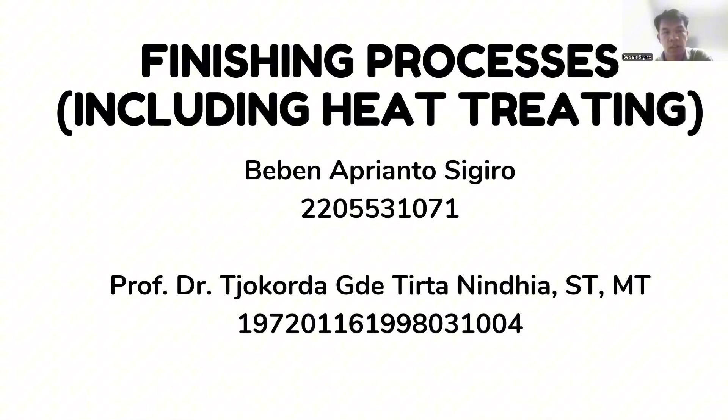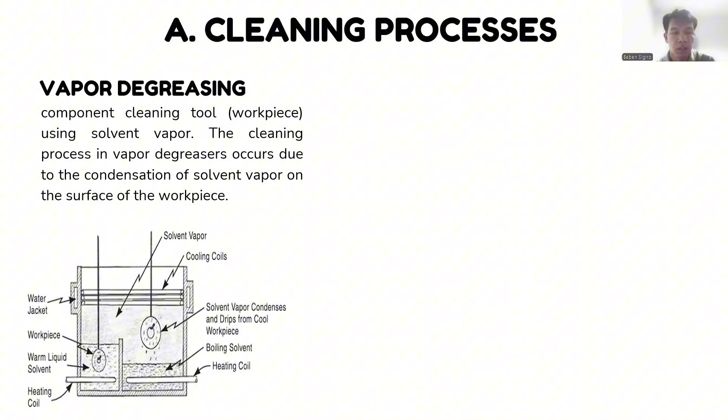Cleaning process: vapor degreasing, component cleaning tool or workpiece using solvent vapor. The cleaning process in vapor degreasing occurs due to the condensation of solvent vapor on the surface of the workpiece.

B. Polishing process, conventional polishing. In addition to enhancing appearance, polishing processes are used to facilitate fluid flow, eliminate burrs, create space for assembly, and eliminate surface indentations that may be stressors or places where corrosive material could become trapped.

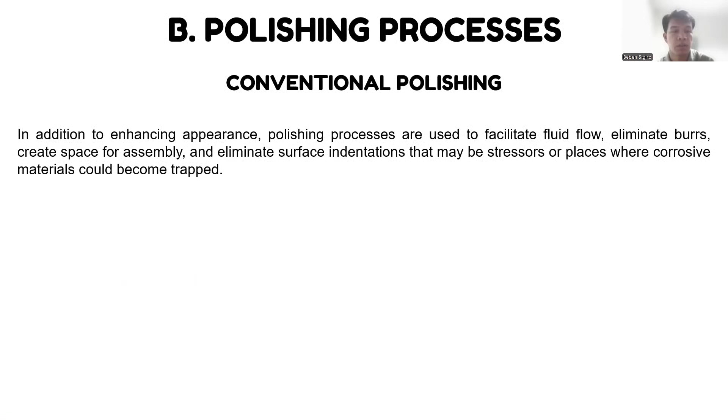C. Plating process, conventional electroplating. The method of applying a different metal to a workpiece by use of DC electric current, which drives an oxidation reaction at the anode and a reduction reaction at the cathode to deposit the metal.

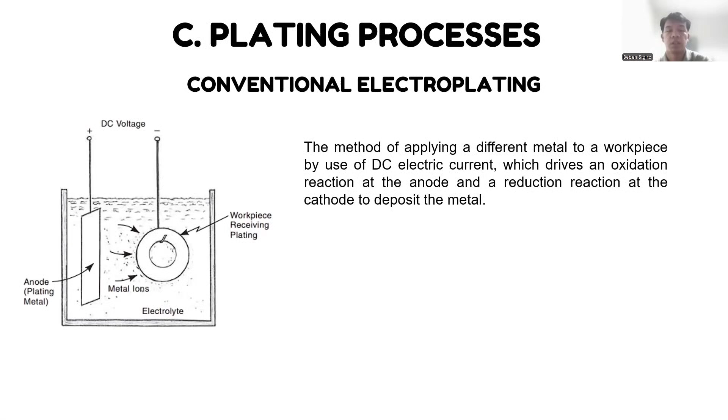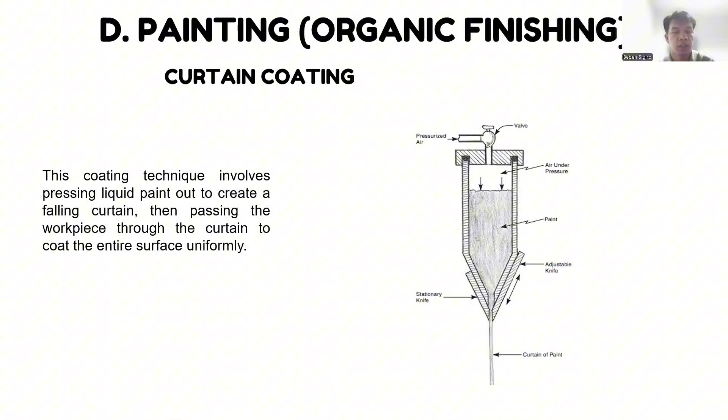Painting or organic finishing: curtain coating. This coating technique involves pressing liquid paint out to create a falling curtain, then passing the workpiece through the curtain to coat the entire surface uniformly.

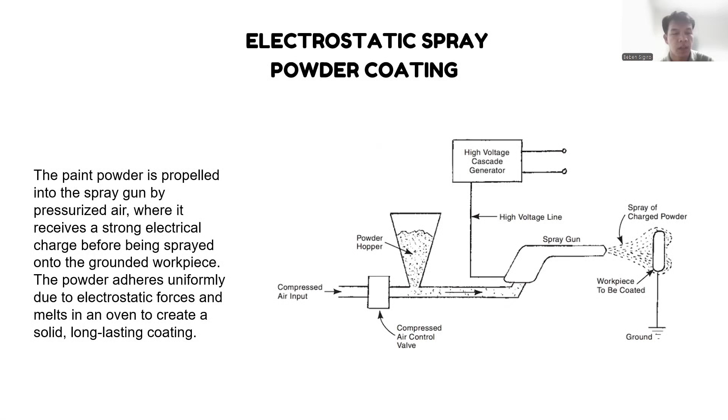Electrostatic spray coating. The paint powder is propelled into the spray gun by pressurized air, where it receives a strong electrical charge before being sprayed onto the grounded workpiece. The powder adheres uniformly due to the electrostatic force and melts, forming a solid, long-lasting coating.

Fluid bed powder coating. The powder is fluidized in a container using compressed air. The heated workpiece is then submerged in the powder. After cooling, the powder adheres to the workpiece surface and melts, creating a protective layer.

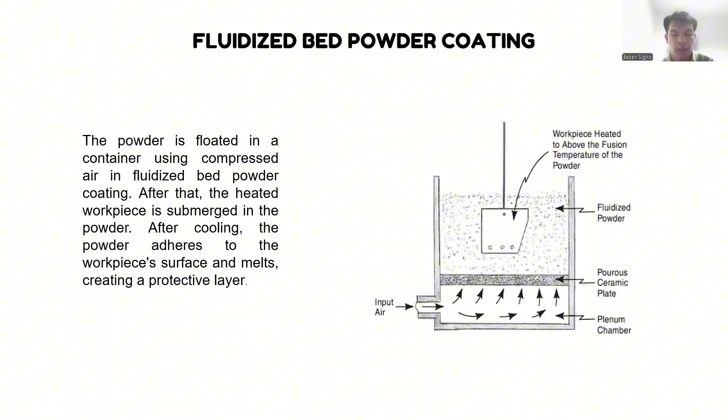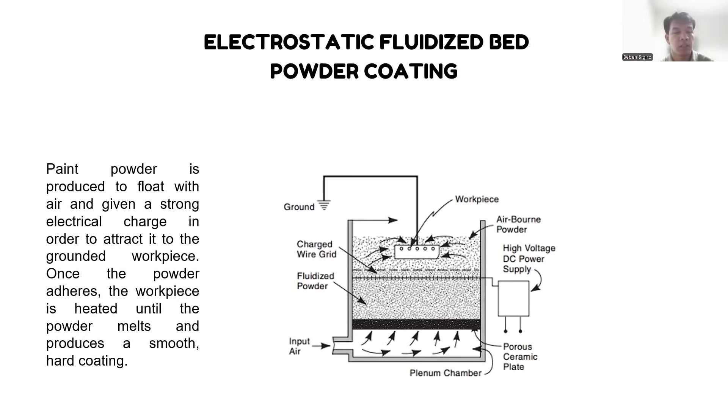Electrostatic fluidized bed powder coating. Paint powder is fluidized with air and given a strong electrical charge in order to attract it to the grounded workpiece. Once the powder adheres, the workpiece is heated until the powder melts and produces a smooth, hard coating.

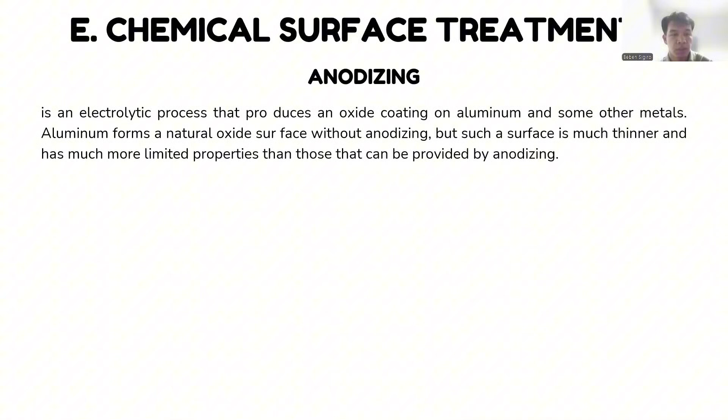Chemical surface treatment: Anodizing is an electrolytic process that produces an oxide coating on aluminum and some other metals. Aluminum forms a natural oxide surface on its own, but this surface is much thinner and has much more limited properties than those that can be provided by anodizing.

F. Other coatings: Vacuum metallizing. Vacuum metallizing is a process of coating thin metal by evaporating the metal in a vacuum, then condensing it onto the surface of the workpiece.

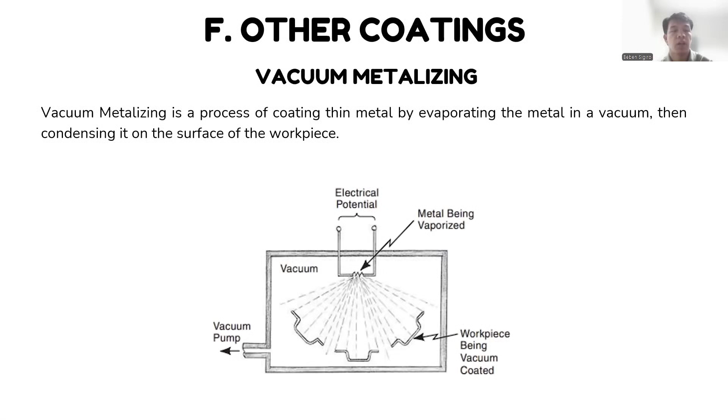Sputtering. Sputtering is a coating process under vacuum in which high energy argon ions strike the target metal surface until the atoms are dislodged and attached to the workpiece surface.

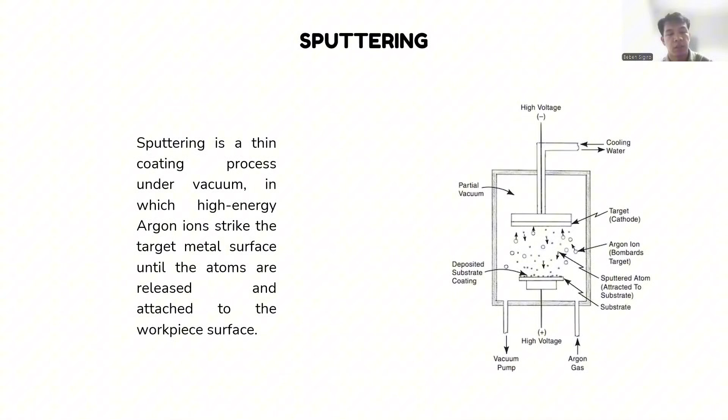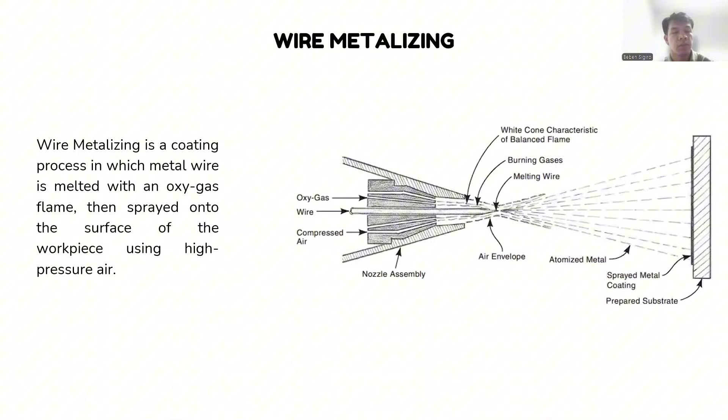Wire metallizing. Wire metallizing is a coating process in which metal wire is melted with an oxy-gas flame, then sprayed onto the surface of the workpiece using high pressure air.

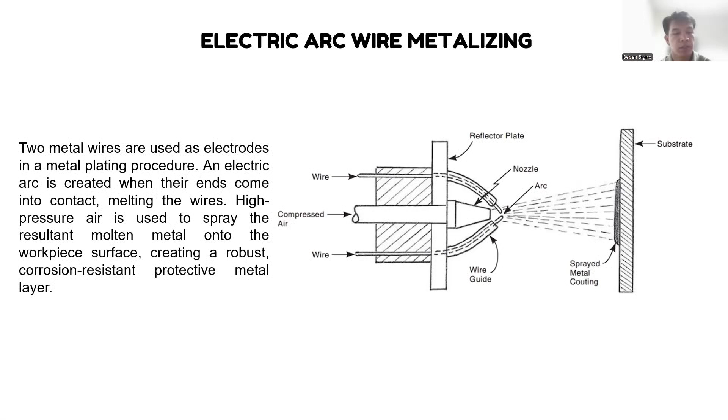Electrical arc wire metallizing. Two metal wires are used as electrodes in a metal plating procedure. An electrical arc is created when their ends come into contact, melting the wires. High pressure air is used to spray the resulting molten metal onto the workpiece surface, creating a robust, corrosion resistant protective metal layer.

Powder spraying. The powder is carried by a carrier gas, then the powder is melted by hot gas and fired onto the surface to form a protective or functional layer on the metal substrate.

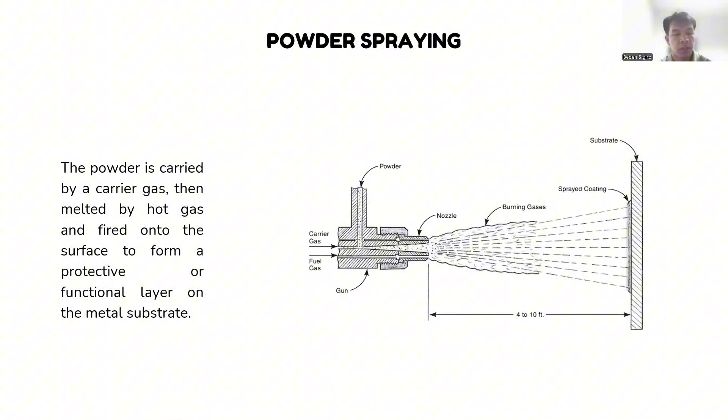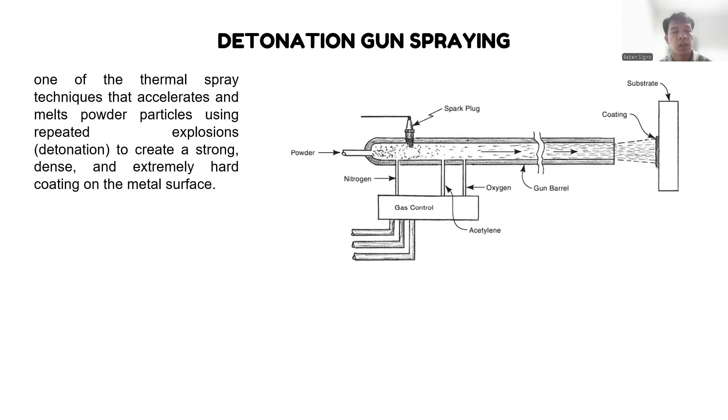Detonation gun spraying. One of the thermal spray techniques that accelerates and melts powder particles using repeated explosions or detonation to create a strong, dense, and extremely hard coating on the metal surface.

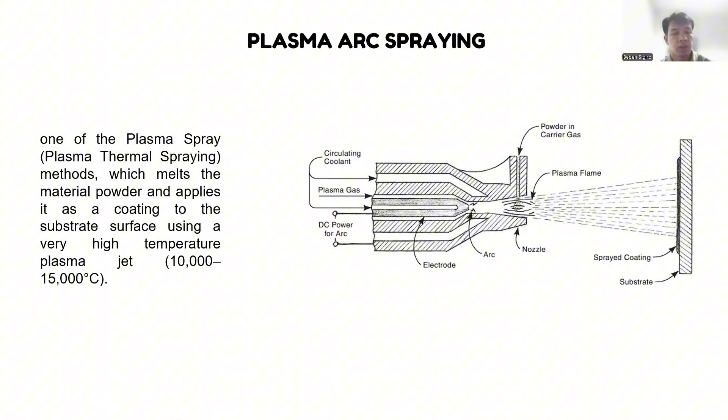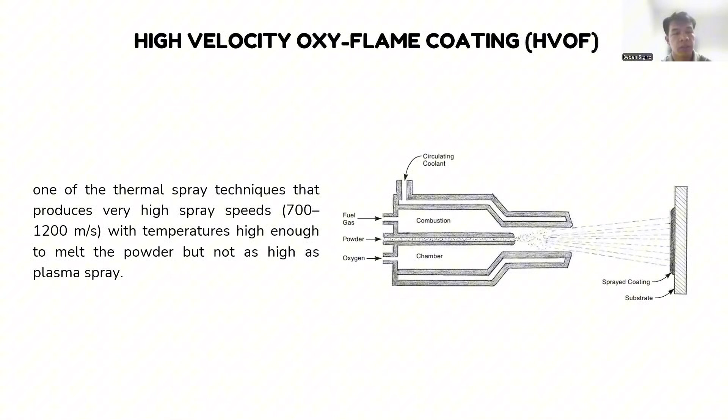High velocity oxy-flame coating. One of the thermal spray designs that produces very high spray speeds, 700 until 1200 meters per second, with temperatures high enough to melt the powder but not as high as plasma spray.

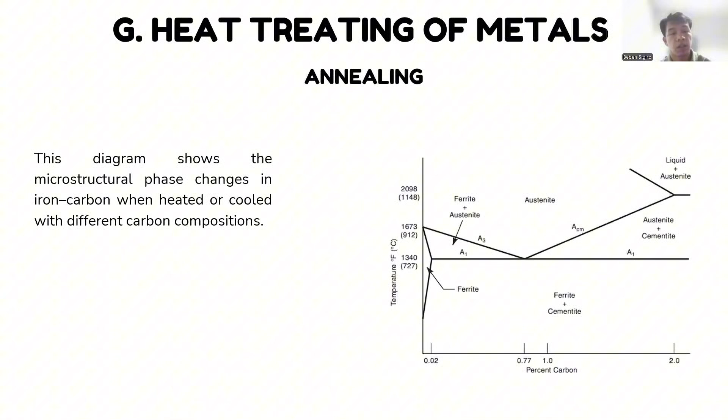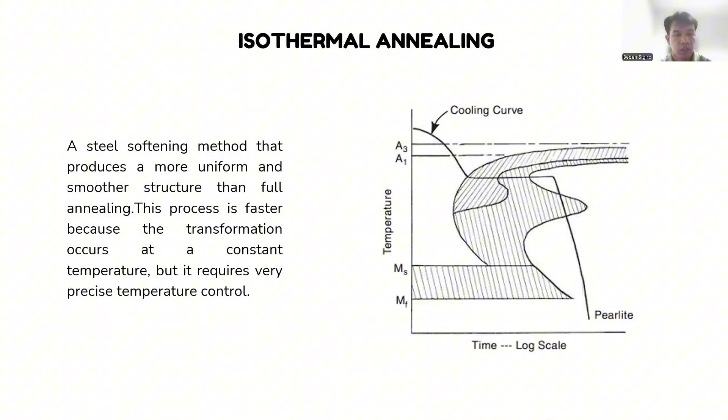Heat treating of metals. This diagram shows the microstructural phase change in iron carbon when heated or cooled with different carbon compositions. Isothermal annealing is a steel softening method that produces a more uniform and smoother structure than full annealing. This process is faster because the transformation occurs at a constant temperature, but it requires very precise temperature control.

Carburizing. The process of carburizing involves heating steel in a carbon-rich environment to add carbon to the steel surface, hardening it while leaving the interior malleable. The workpiece is put in a closed container with an activator.

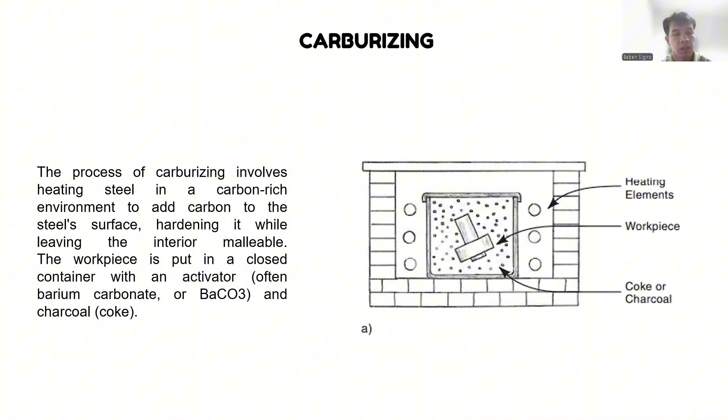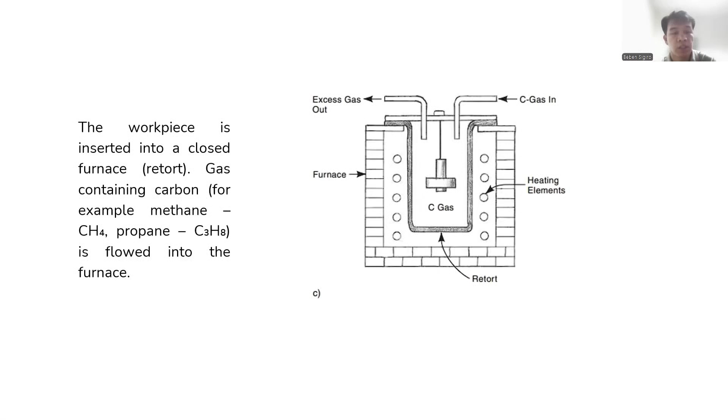The workpiece is dipped into a molten salt bath containing a carbon-bearing compound or a solid carburizing compound. Alternatively, the workpiece is inserted into a closed furnace or retort, and gas containing carbon, for example methane, is flowed into the furnace.

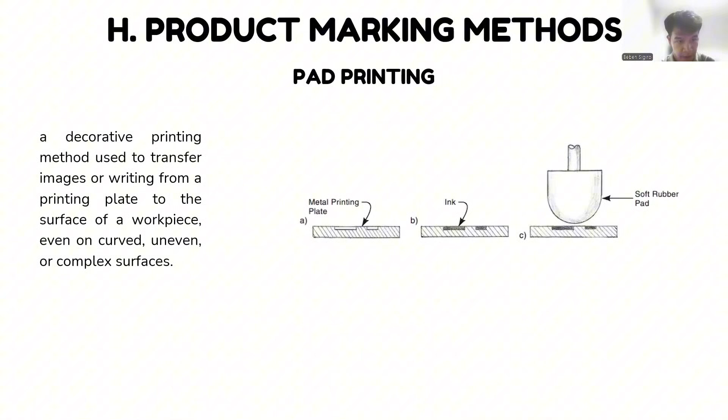Product marking methods: Pad printing. A decorative printing method used to transfer an image or writing from a printing plate to the surface of a workpiece, even curved, uneven, or complex surfaces.